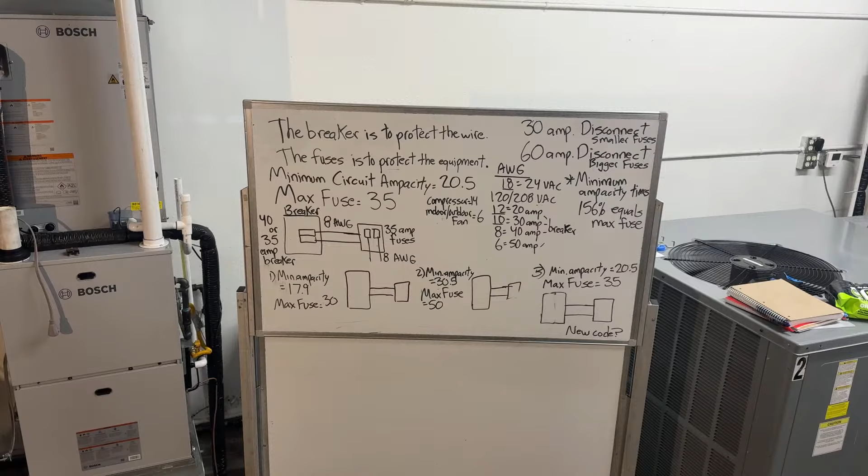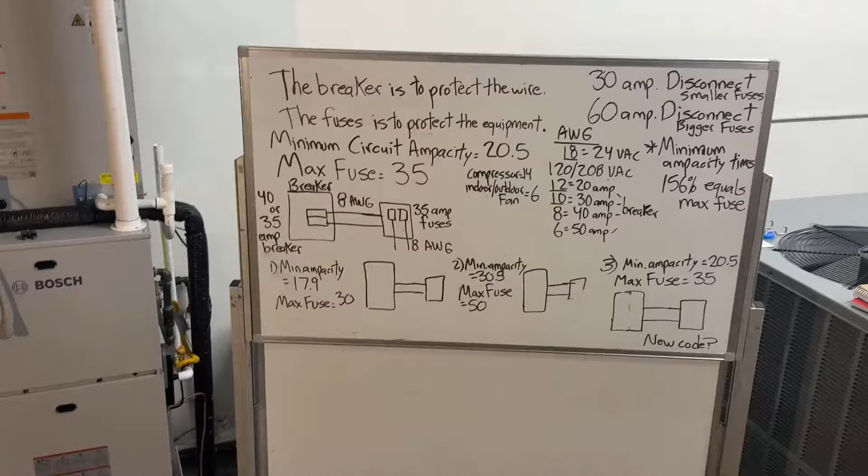Hey friends. I'm already gonna start, so I'm gonna get everyone to come right here. I'm already live, but that's fine. I'm gonna just see if you guys can get a good view here. Let's see if I can get closer. All right, think we're good to go.

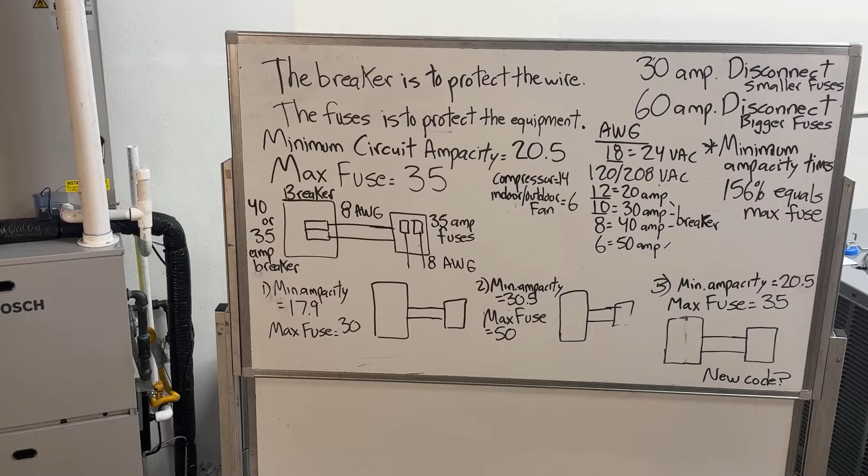He's working on that, right? So, no, you're good. You're good.

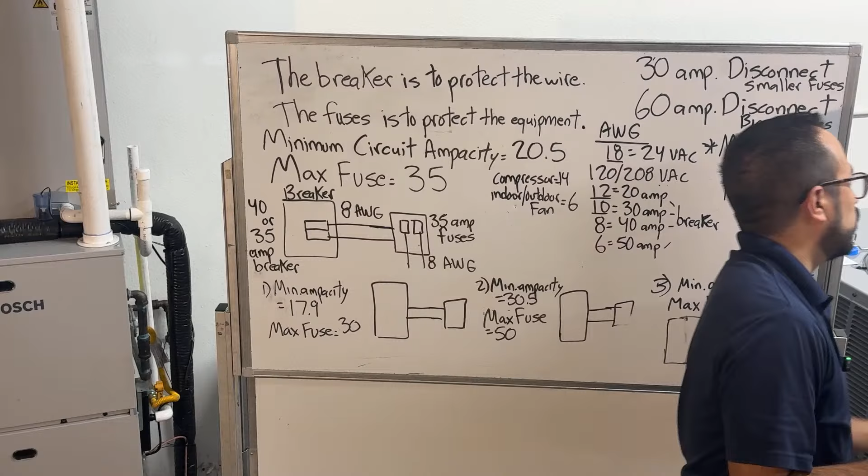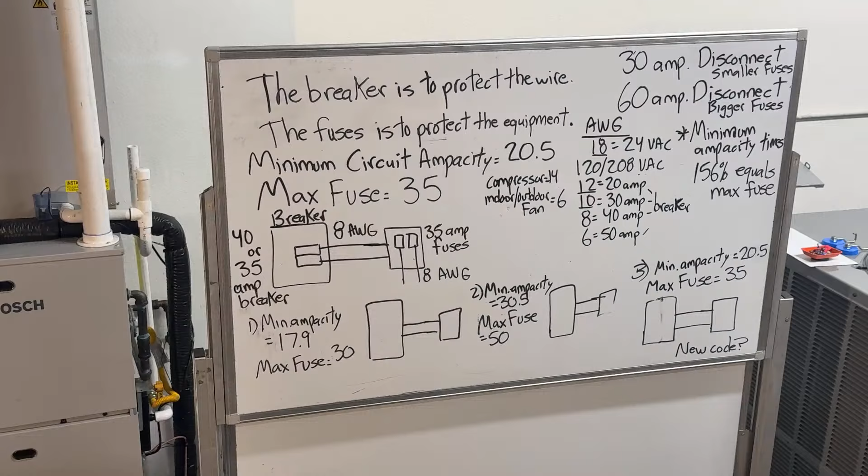I wanted to go over something with you guys today. You know what? Oh, you guys are gonna stand there, so I'll just tilt it this way. Let me just make sure they can actually see it.

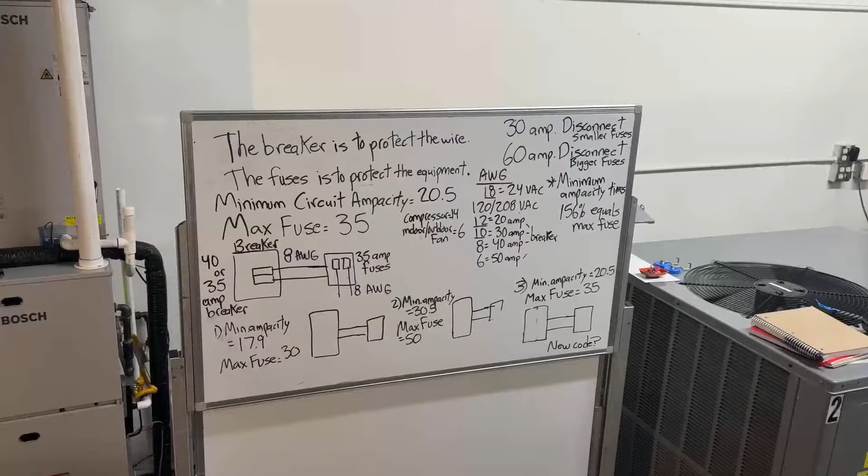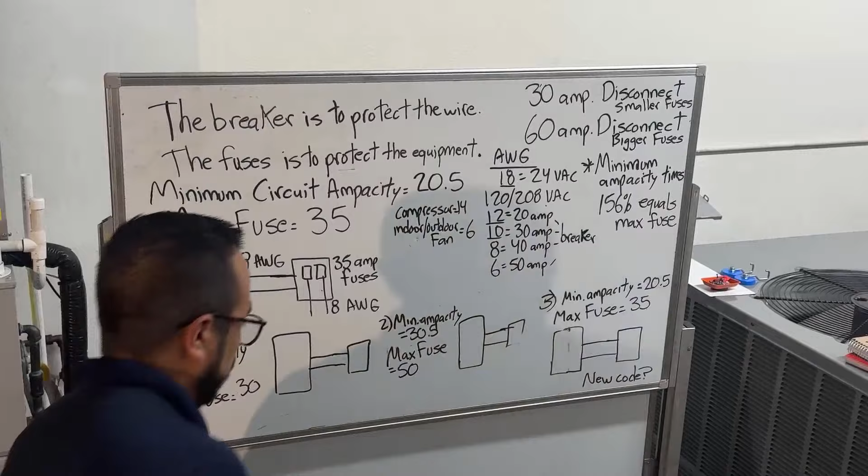Okay, so, whoa. All right. Yeah, you're good. You're good. All right. See ya. See you tomorrow. You have a good night. Take care. All right.

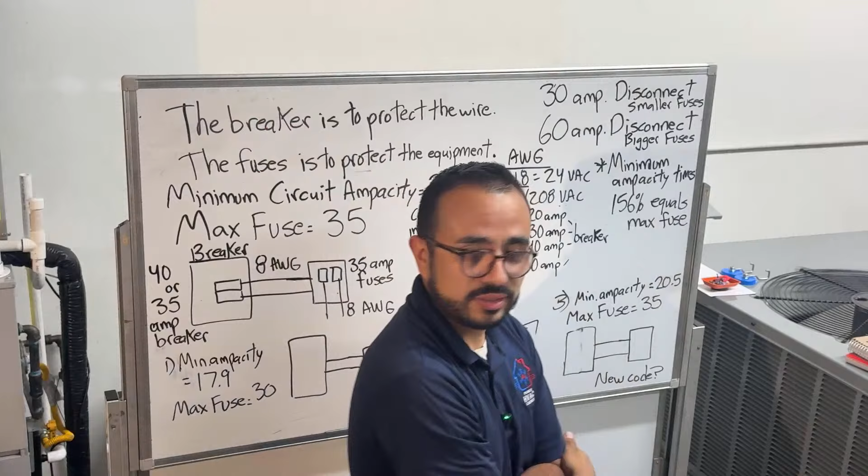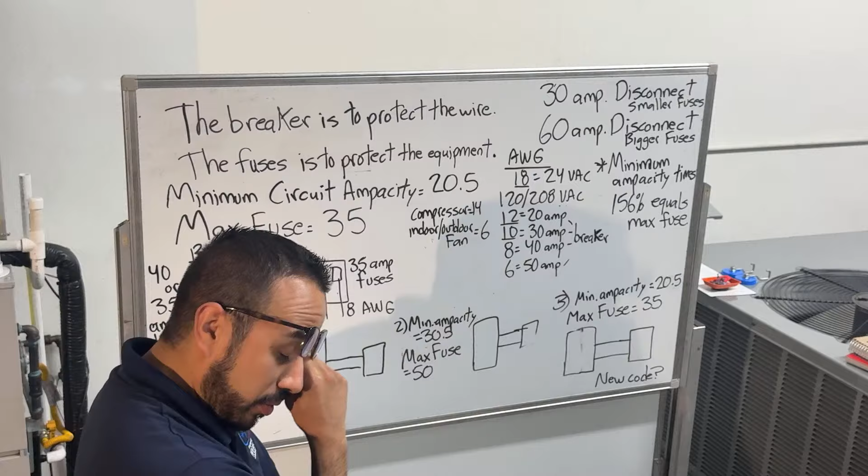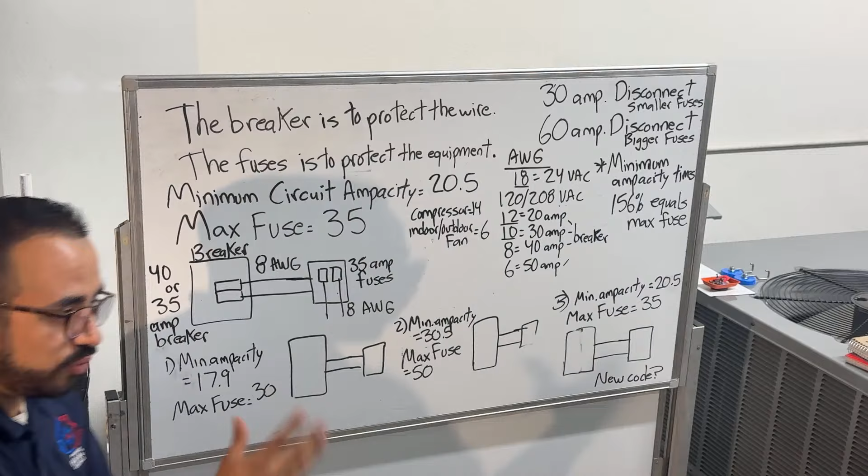See you tomorrow. So I wanted to go over this concept. To be honest, this took me about 6 months to learn, just because no one would tell me, like, 1 + 1 = 2. Why are you telling me that 5 - 4 = 1? Just tell me the easy way of understanding this. It was just overcomplicated.

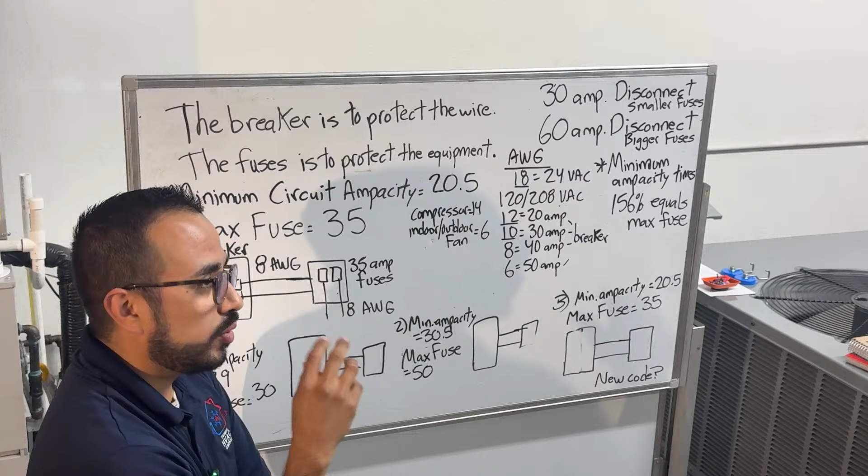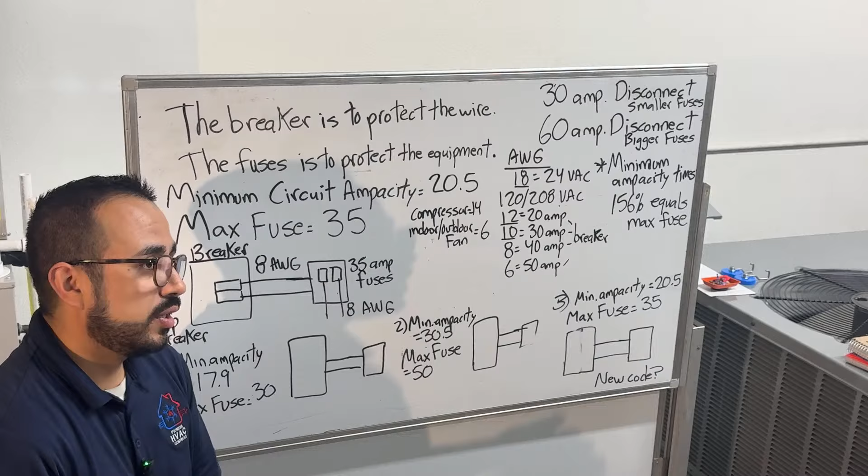I forgot this guy's name, but he's like the electrician guru. I was watching a video on how to understand this, and he was teaching it a certain way. Then I got someone to come in, one of my mentors, 50 years in the field, doing HVAC for a long time. When I told him about max fuse and minimum circuit ampacity, he's like, what that electrician guru is teaching is wrong.

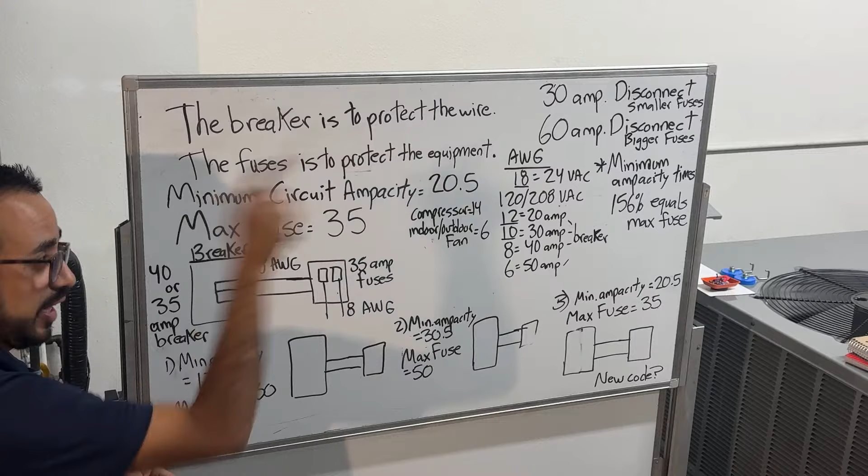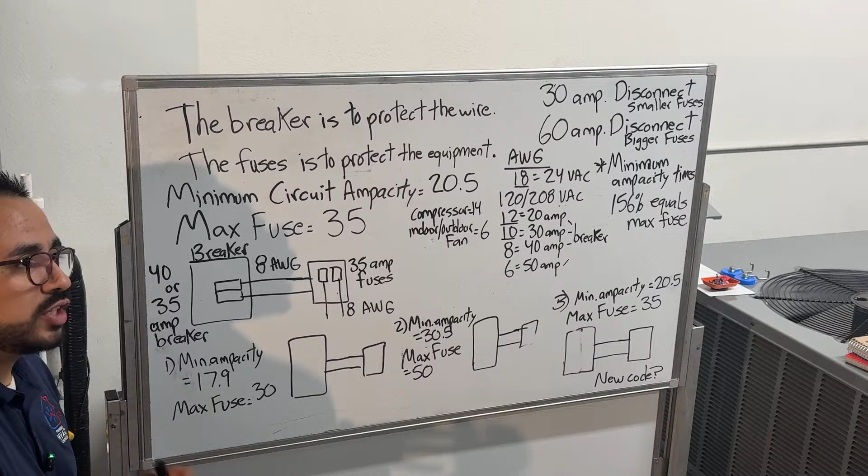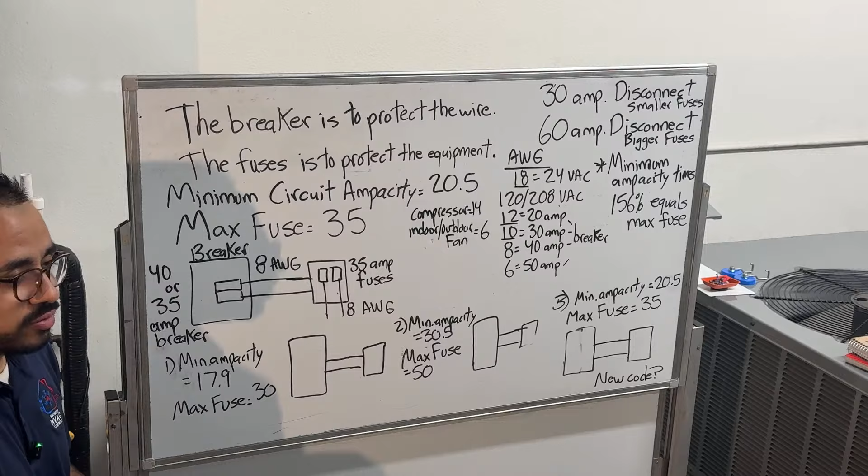I even got the electrician teachers to come, and I'm like, okay, who's right here? Who's wrong? And they were saying, look, when I go to a job where I have to run power for an HVAC system, I just listen to what the HVAC contractors tell me to do, hoping that it's somewhat accurate. But after a couple months, I finally understood how the max fuse and minimum circuit ampacity work.

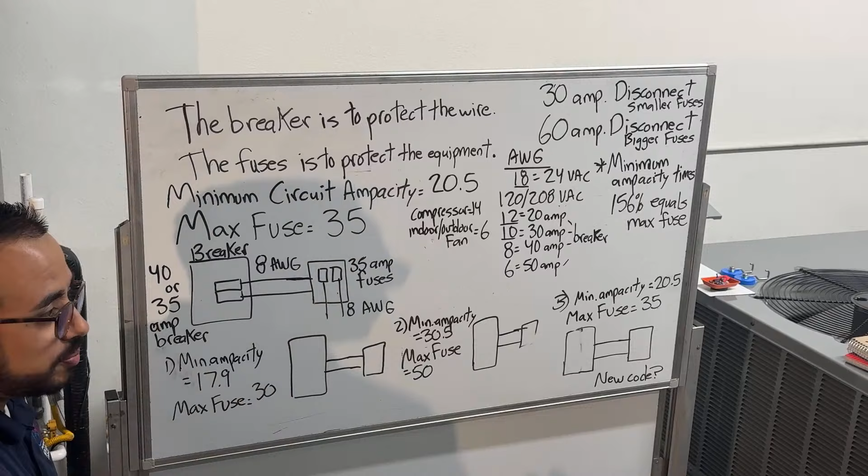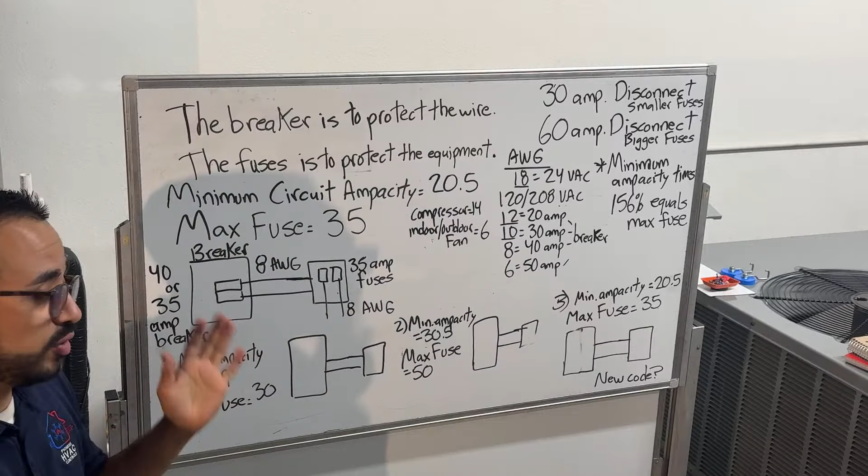So hopefully I can explain this in the next 20 minutes or so, because this is important when you're running power to your air conditioning systems, whether it's a furnace, a package unit, a mini split, or a condenser. You got to bring power in, right? But you don't know what breaker size it should be, or the wire gauge, how thick or how small the wire should be.

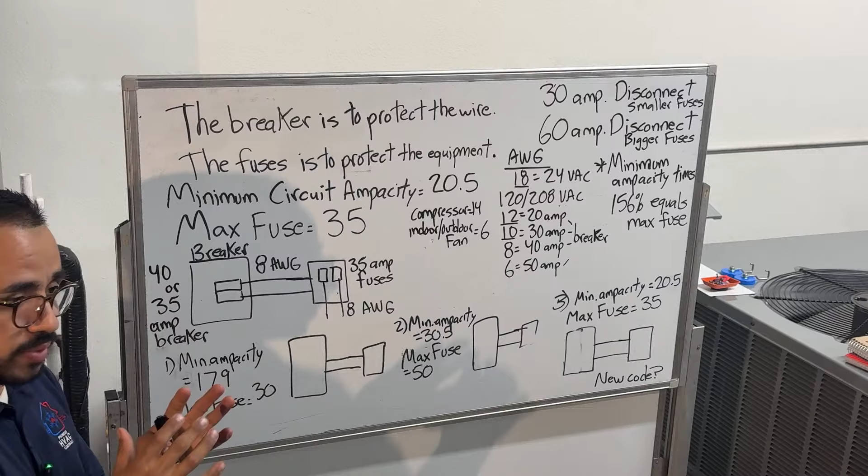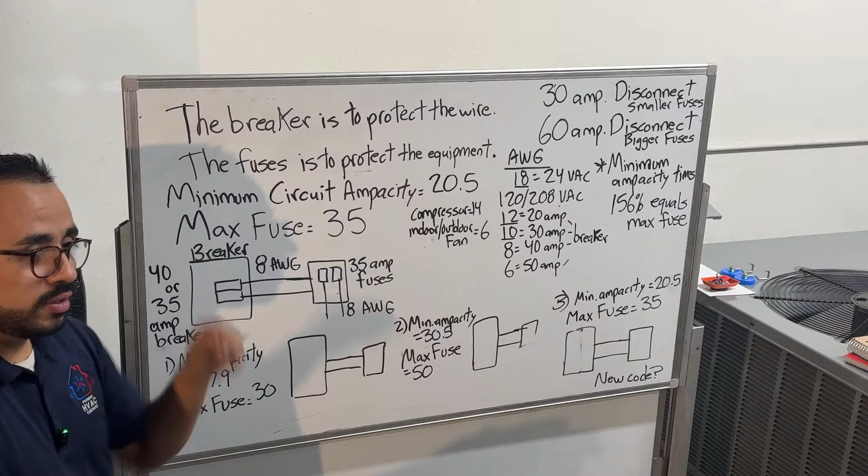All that matters. So the first thing to understand is what a panel is, where all your breakers are at. Does everyone understand what that is? Okay, I want to make sure, because if you don't, it's going to be confusing. So everyone's good? Your panel is all the way over there.

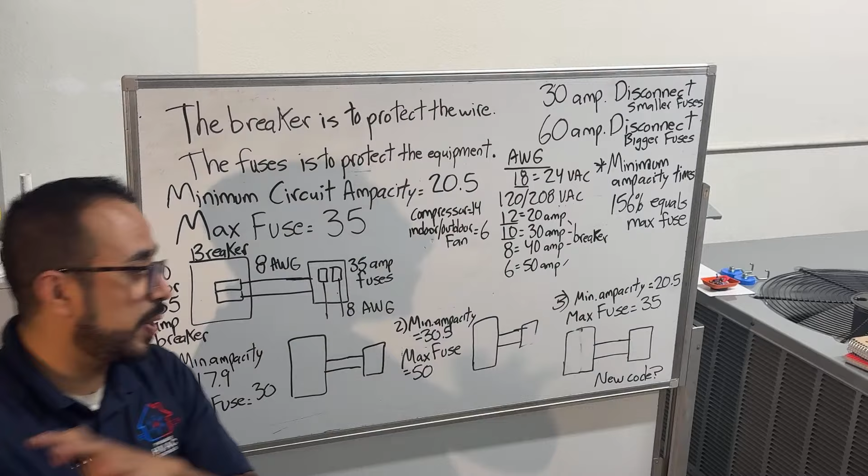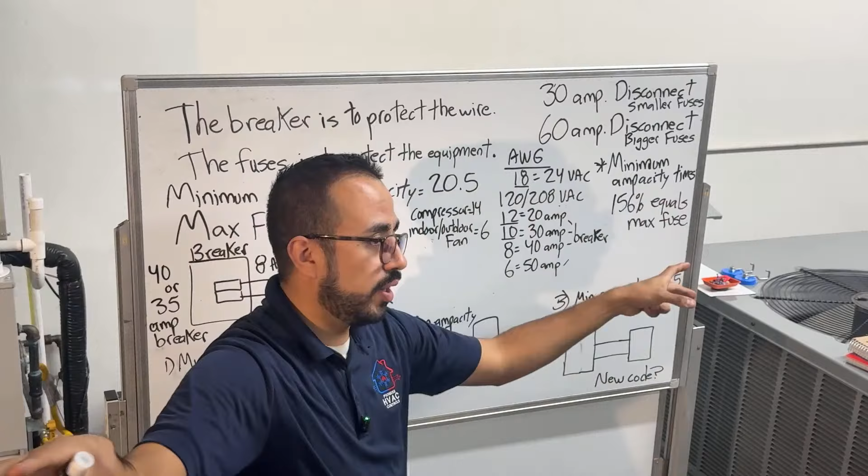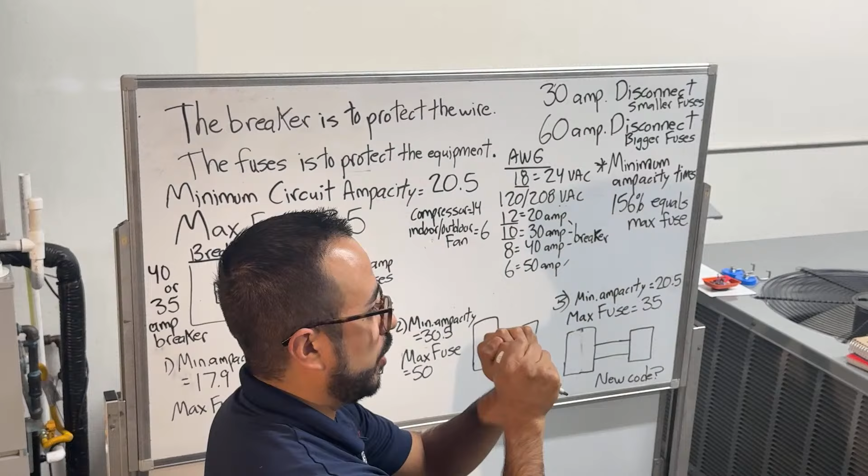Your breakers are there. You have high voltage power coming from the pole, from the city. It comes in a big conduit into the panel. And then you got breakers that distribute power everywhere: 30 amp breaker, 20 amp breaker, 50 amp breaker, whatever it is. It comes to this distribution location, goes through breakers first, and then goes out to different places.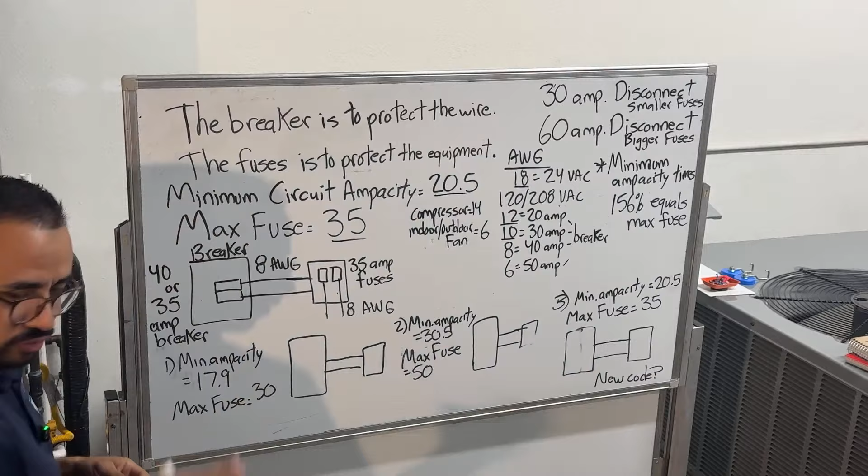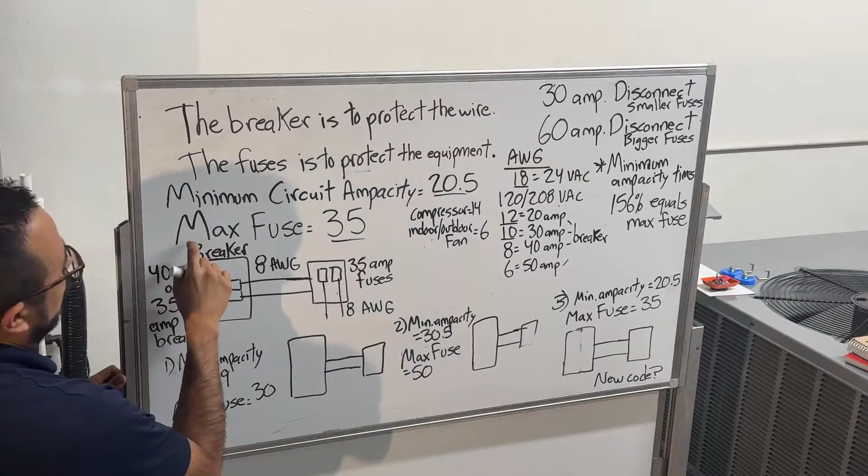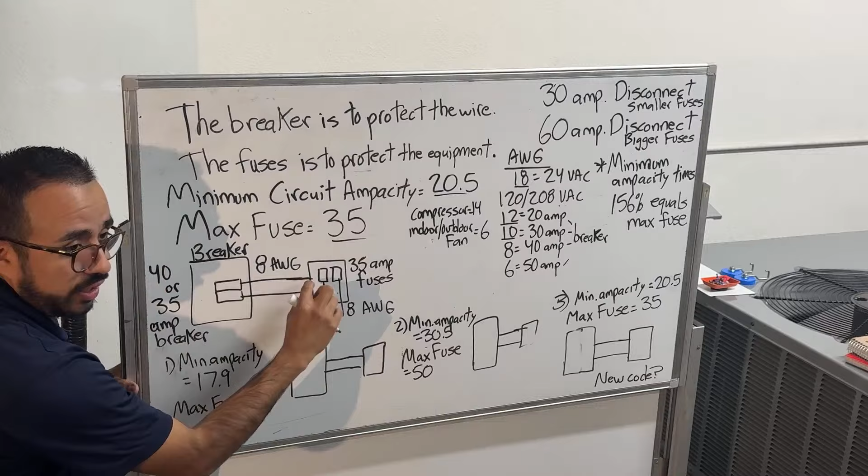We'll go over examples that we have here in the lab. But every unit that you work on, you're gonna see two things: minimum circuit ampacity and max fuse. The idea behind any install is you have your panel where your breaker is. You got to put the correct breaker, the correct wire size, then the disconnect with the correct fuses, and the correct wire size going to the unit. It's a lot of little steps.

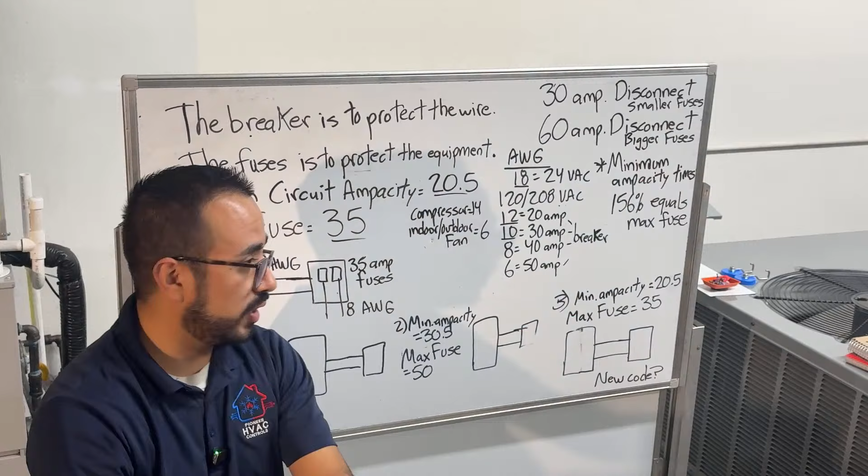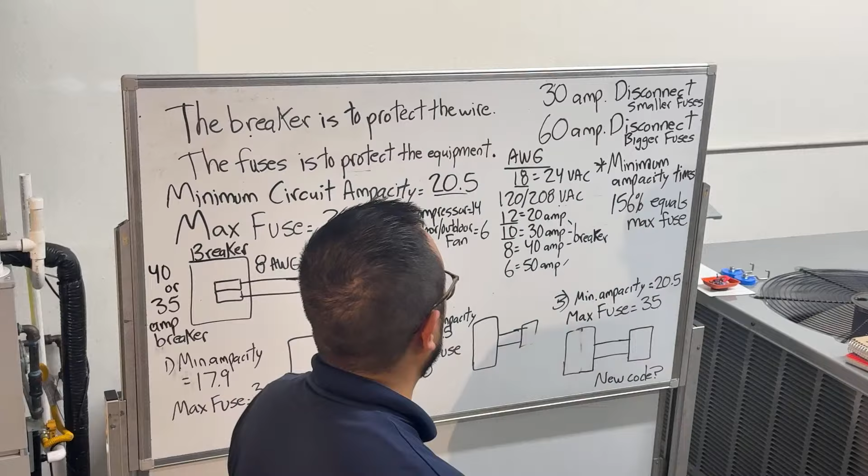So just to emphasize the point, the breaker is to protect the wire, the wire going from the breaker to your disconnect. Your disconnect is that right there. The fuses are to protect the equipment, okay? So just be mindful of that. We'll go over that a little bit right now, but you got 2 disconnects out there.

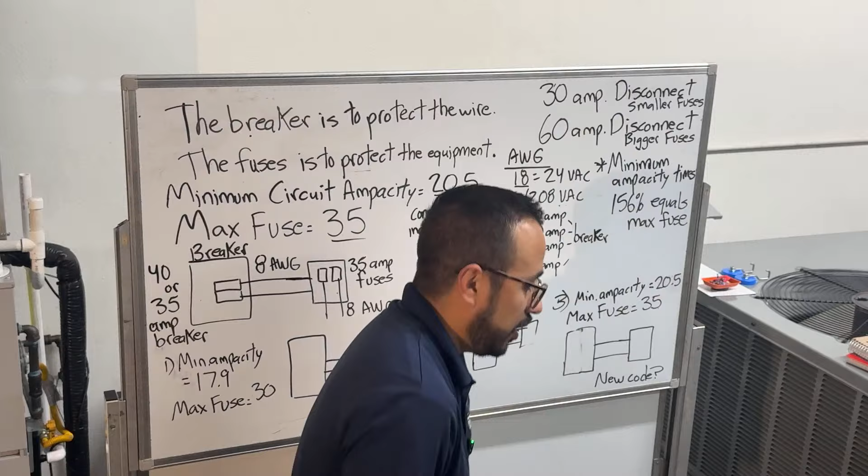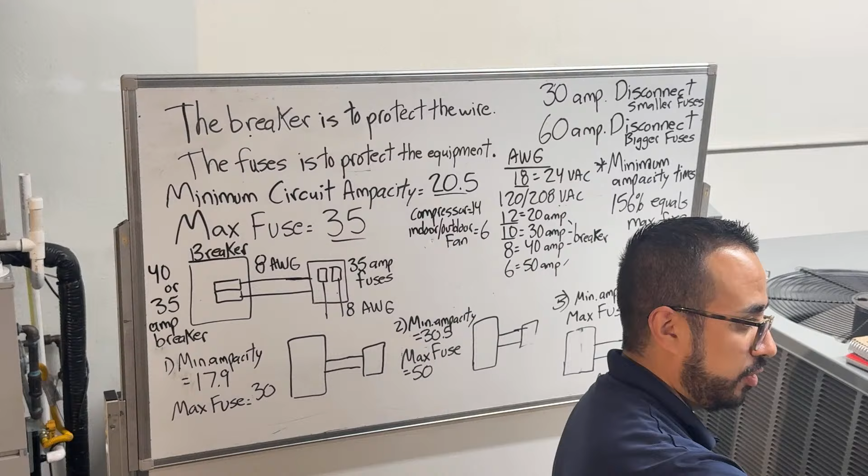You got a 30 amp disconnect and a 60 amp disconnect. So these mini splits right here, these are smaller, and you know that these are the 30 amp disconnects because the fuses are small. Once you go past 30, like 35, 40, 45, 50, 60, you can tell that disconnect's a lot bigger; it takes the big fuses like this. They only have 2. That's all you're gonna be dealing with, right?

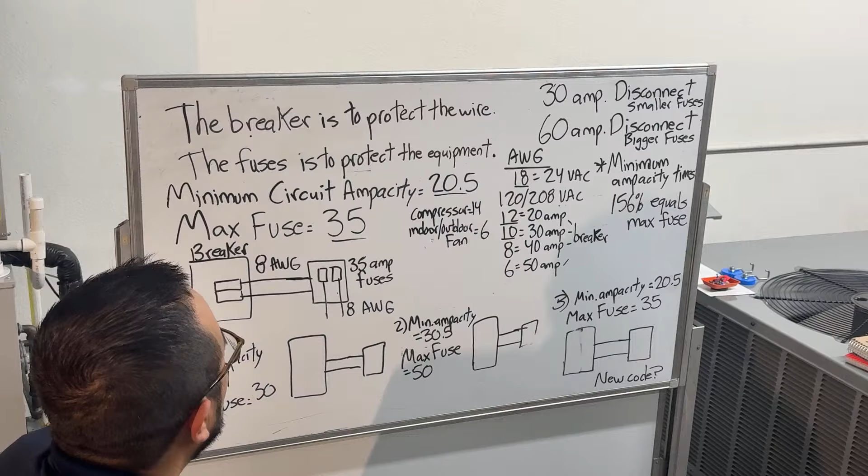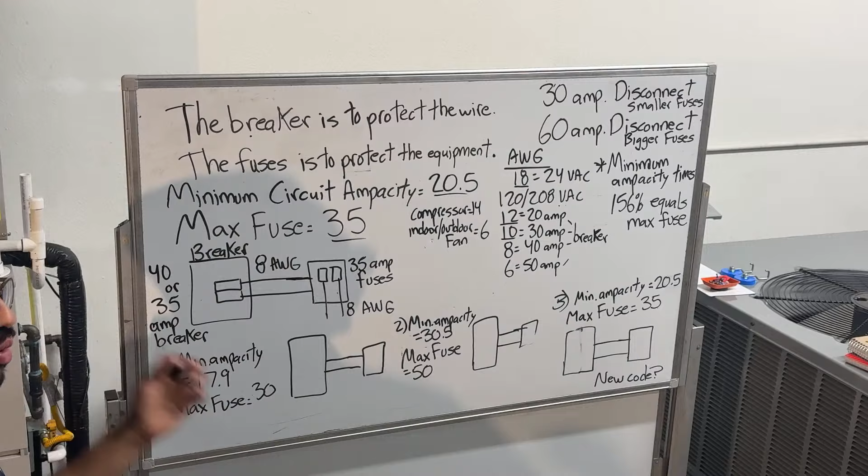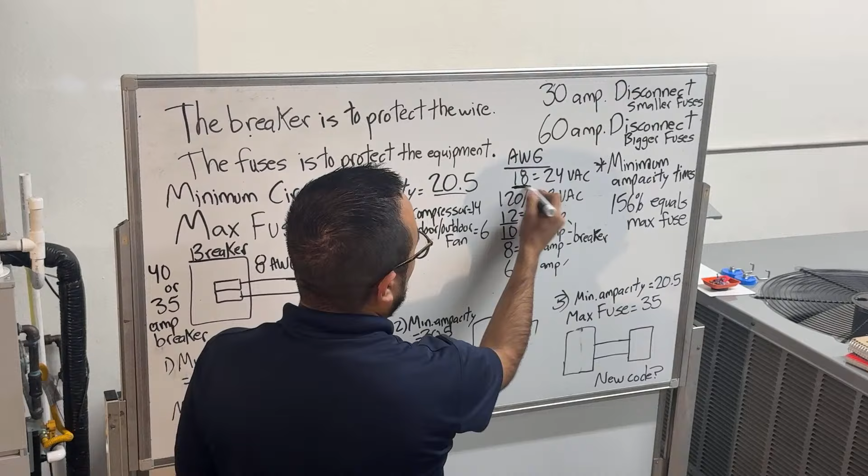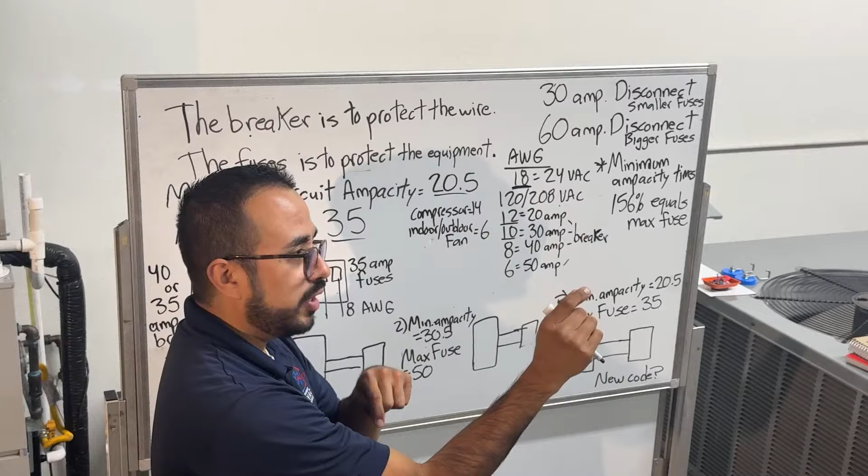You only have 2. Okay, so here in the United States, American wire gauge, HVAC's always the opposite, which I kind of hate sometimes. Superheat, subcool, why is it the opposite? With electrical, it's the opposite in this sense. American wire gauge, the higher the wire gauge number, the skinnier the wire. So think about your 24 volt circuit. Are your wires pretty thick for your thermostat? They're not. It's usually an 18 gauge, okay?

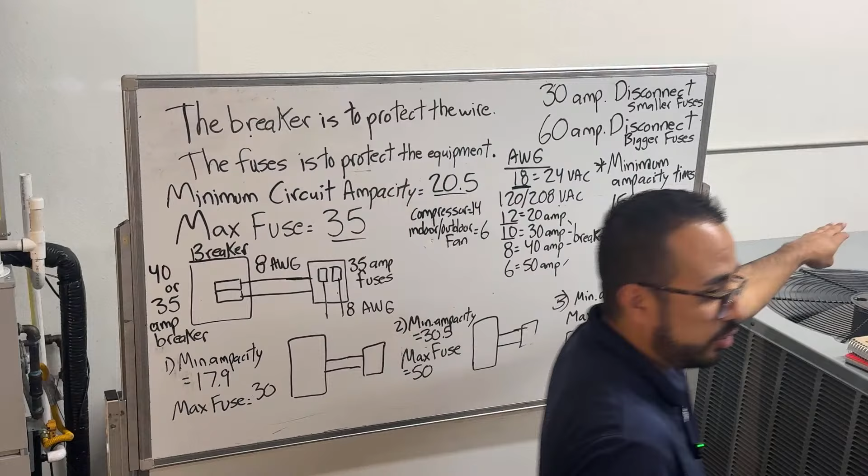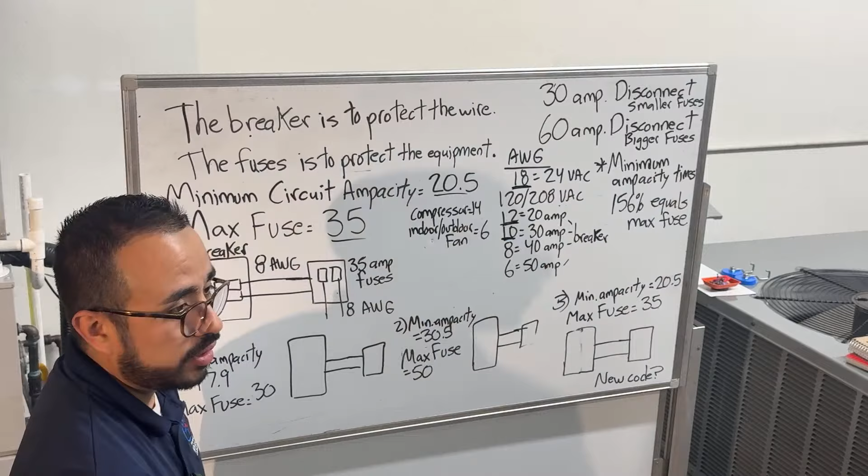Now when you're dealing with higher voltage, like your outlet power there, 120 volts, there you got a 12 American wire gauge. It's a little bit thicker. But as you increase the amps, you must increase the size. Because if you put a 30 amp breaker and you run 12 gauge wire, that wire can burn up or cause other issues, because more amps means what? More current. And what does more current mean? More heat. So you can burn the house down, but as you increase in amps, you have to increase your wire size too.

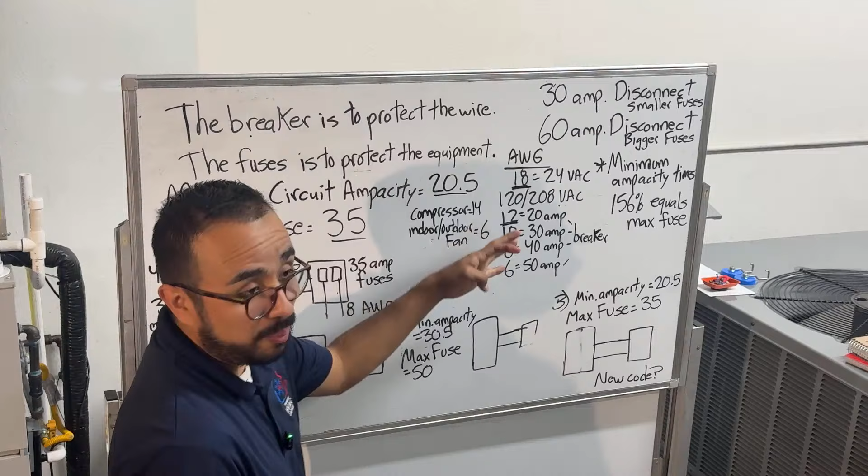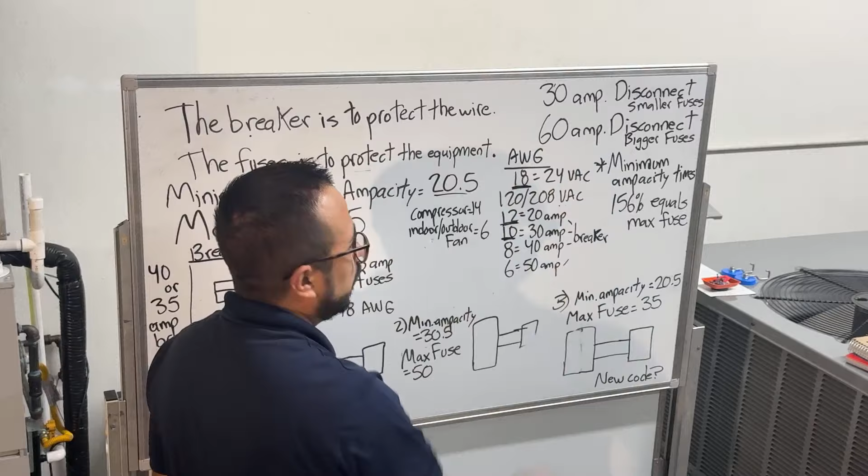Okay? And I think that's kind of simple, right? But it's the opposite though. The lower the number, the thicker the cable is, and more expensive, of course, too. So does this part here make sense? Okay. So what does this mean? The minimum circuit ampacity, max fuse.

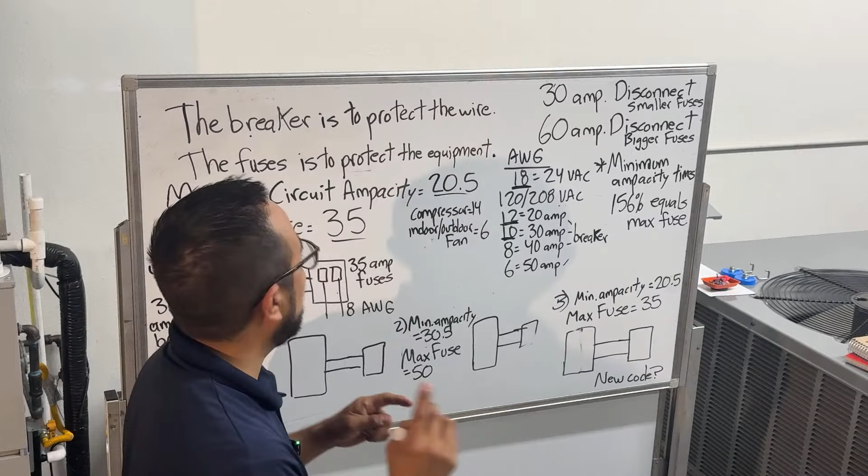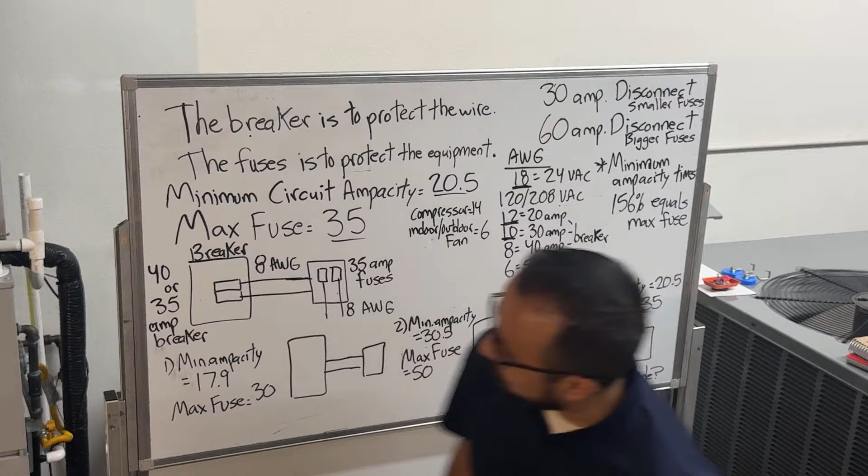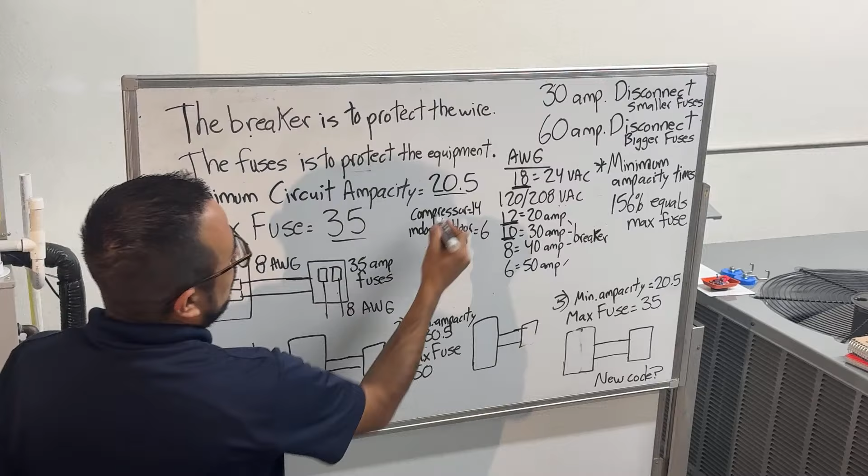So right now, just take a minute, go around the lab. You can look at this package unit over there, or some of these mini splits. We're gonna use this example, but this principle applies to all of them. It took me 6 months to learn. But go ahead and walk around just for a minute. Look for those two things: minimum circuit ampacity and max fuse. Just a couple of seconds, and then come back and we'll talk again.

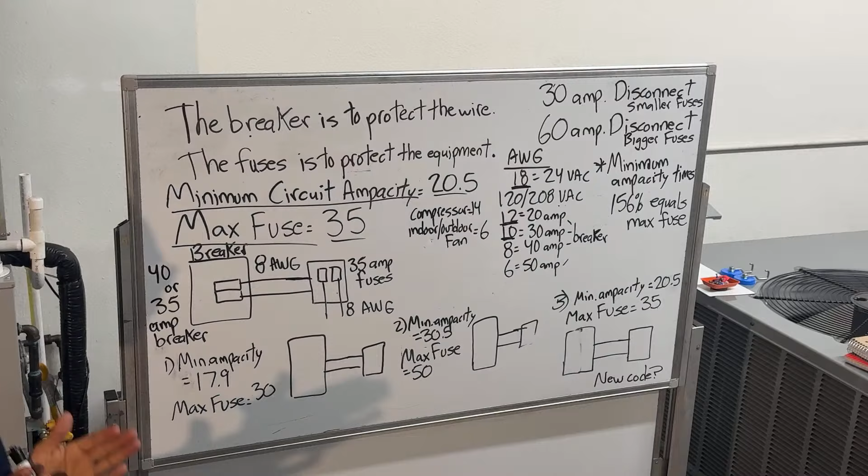I want you guys to believe that those actually exist on units, that I'm not lying here. So go ahead and look for that. You're gonna notice that the max fuse is gonna be greater than your minimum circuit ampacity. So go to condensers. You can move that ladder if you want to. Go everywhere. The minimum ampacity is going to be lower than your max fuse. Understanding this is going to help you on your next job, to know how to size it correctly.

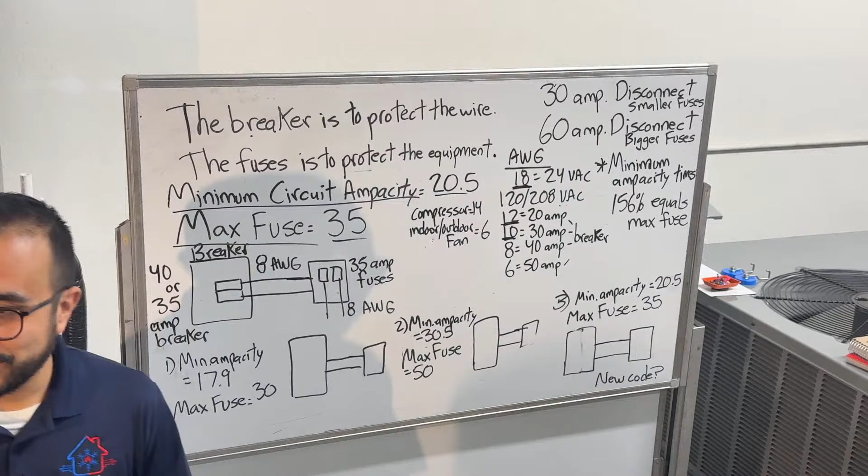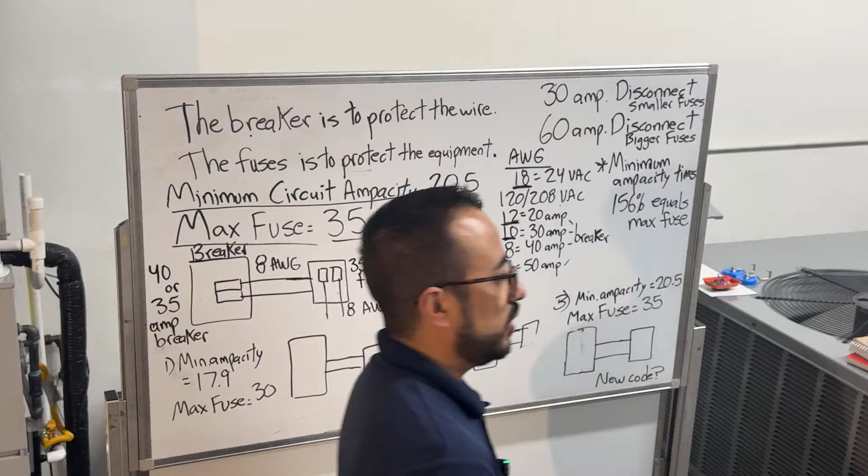You saw it, right there? Yeah, okay, good. And did you guys find it over there too? Kind of? Should be on the plate there. Minimum circuit ampacity, max fuse. Good? You guys saw it?

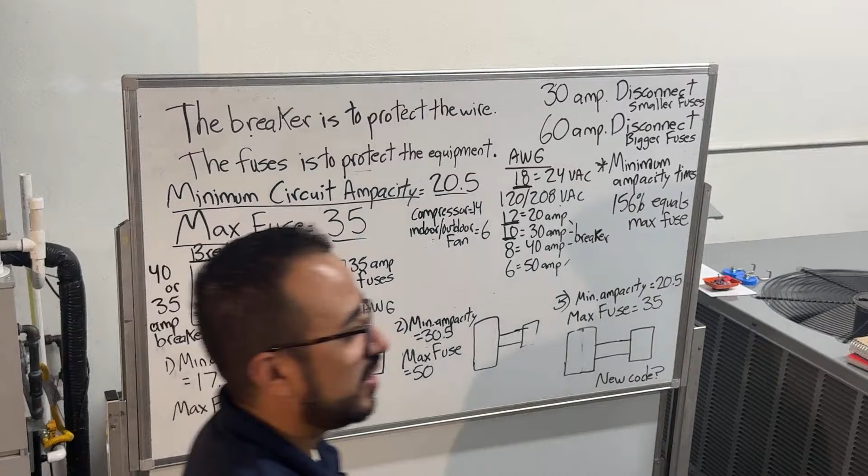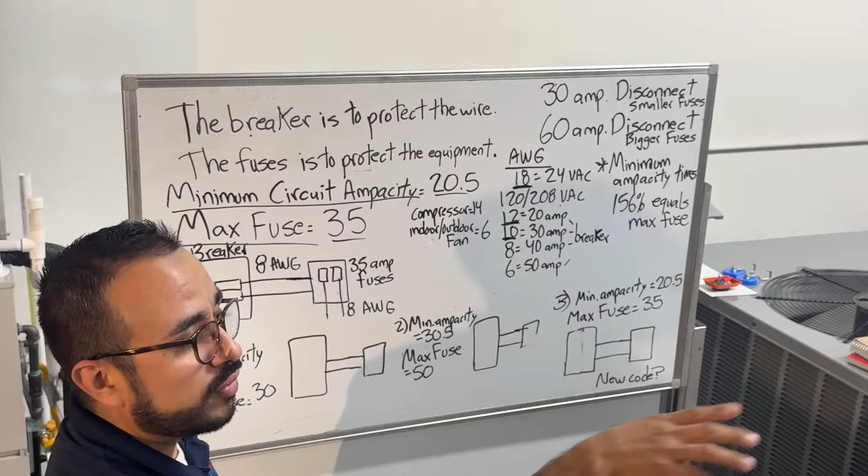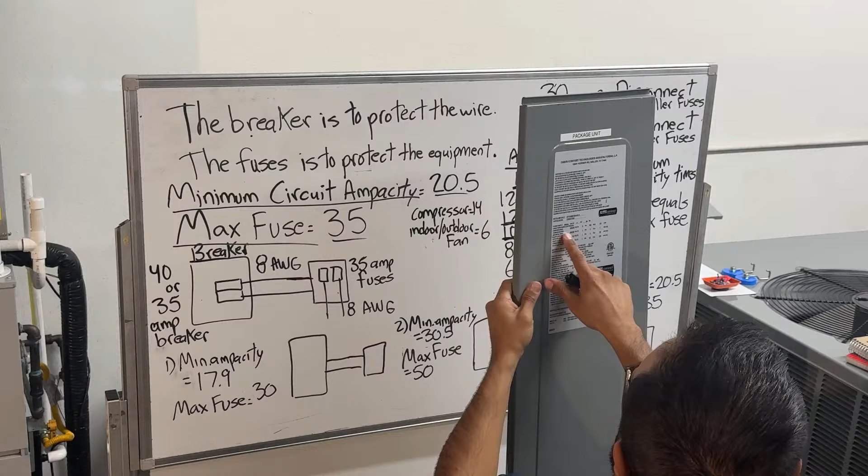So yeah, 253 max and 197 minimum. That's your minimum voltage. You're gonna look for something that says max. If that one's harder to read, just look at this one here. Where is it? Oh, right there. You're right. Minimum circuit ampacity 29.3, and then max fuse 40.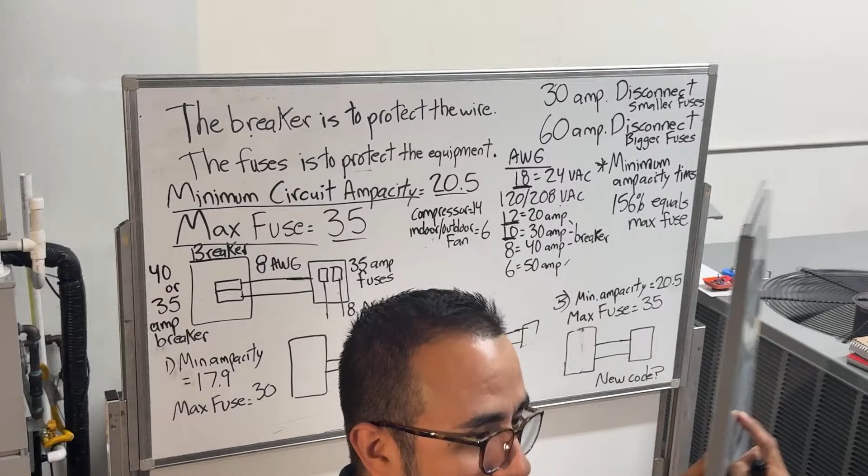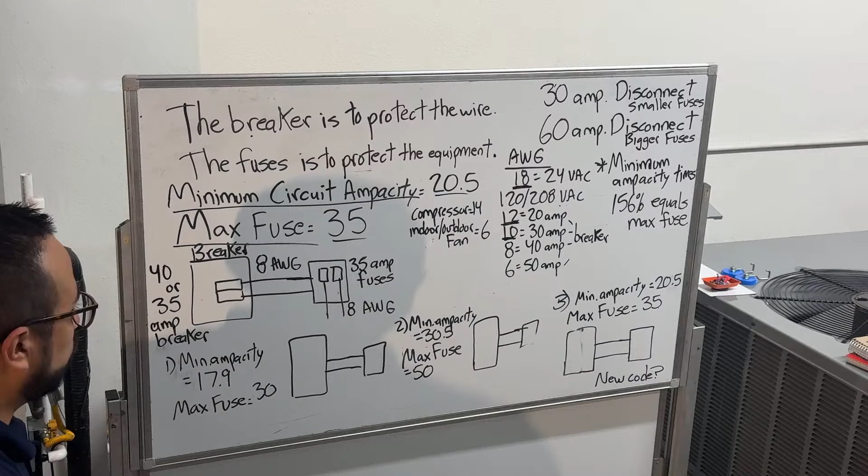Okay, so the panel's gonna have this, and we gotta look at this to help us size the equipment correctly. Every unit's gonna have that, all your mini splits. So now we have to size the equipment correctly: from the breaker, wire, disconnect, fuses, and then wire from the disconnect to the actual unit. It's a lot of stuff.

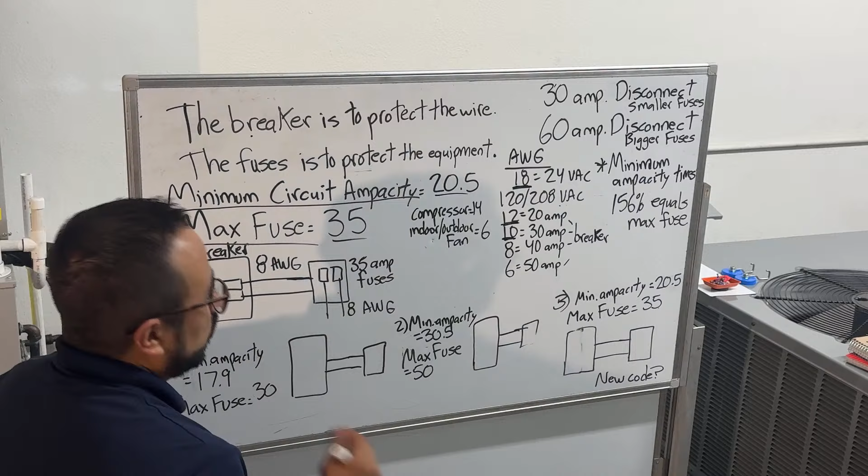Now, I didn't know this for a long time, and it makes sense, but why is there a big difference between minimum and max fuse? So in this specific example, your minimum circuit ampacity is 20.5 amps, okay? I don't know where they got this number, but how they calculate the 35, they times this by 156%, okay?

I don't know what engineer came up with this, but it makes sense once we do the math. So your minimum circuit ampacity times 156% equals your max fuse. Okay, it's gonna make sense right now. So let's say the minimum that unit is gonna pull is 20.5. Let's say the condenser coil is clean, the evaporator coil is clean, all the motors are working right, it's not overcharged. If it's a really hot day, it's gonna work harder, right? So current's gonna go up. But on a normal day, it's telling you it's gonna pull about 20.5.

Your compressor's gonna pull maybe, this is just examples, right? 14 amps. Your motors and all that is gonna pull 6. It's close to that 20.5. But that number can change because on a really hot day, and if you don't do good maintenance, that amp draw is gonna go up. And the way they determine this is they take this number and they times it by 156%.